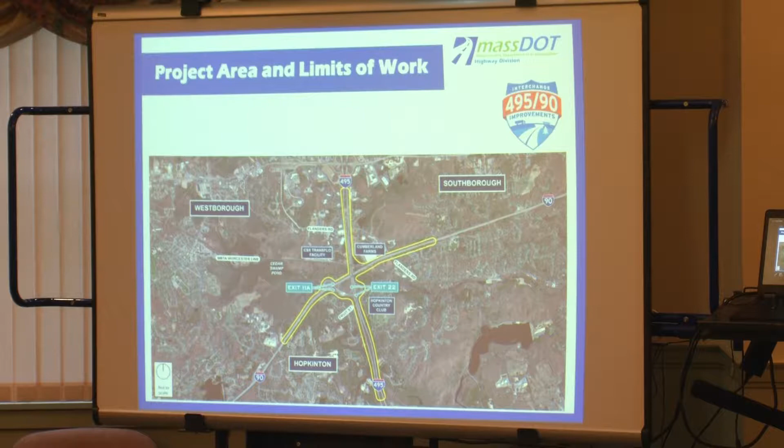With that, I'm going to turn it over to Joe Cahill. Joe is the project manager for HNTB and the entire design team.

Thank you. Like Ryan said, this is our third round of public meetings, so each successive round of meetings we've gone a little bit farther with the design and the presentation. The first round was very much data collection. We wanted to hear from people as far as what they identified as the issues, and to present some of what we were seeing from an existing conditions standpoint.

Last round we presented the alternatives that were under consideration and some preliminary evaluation of them. So now this meeting, we're going to spend some time talking through that evaluation and then focus mostly on what MassDOT has identified as the preferred alternative that's going to be carried through design.

So going back, we've spent the last 1 to 2 years doing extensive data collection efforts. We looked at traffic conditions, crash rates, the environmental conditions that Ryan mentioned as far as what's surrounding the interchange, and used that to really help guide our process. What we found is that the interchange, as many of you who drive through it know, doesn't meet the current traffic conditions today, and not surprisingly, doesn't meet them in the future.

It has a high crash rate. We see a crash out there every 3 to 4 days on average, and a lot of that is due to the undesirable weaving and queuing conditions. Traffic backs up from the ramps onto the main line highway. Also through the former toll plaza area, there's a lot of weaving movements to get through that area. So they all help contribute to a higher than average crash rate for the interchange.

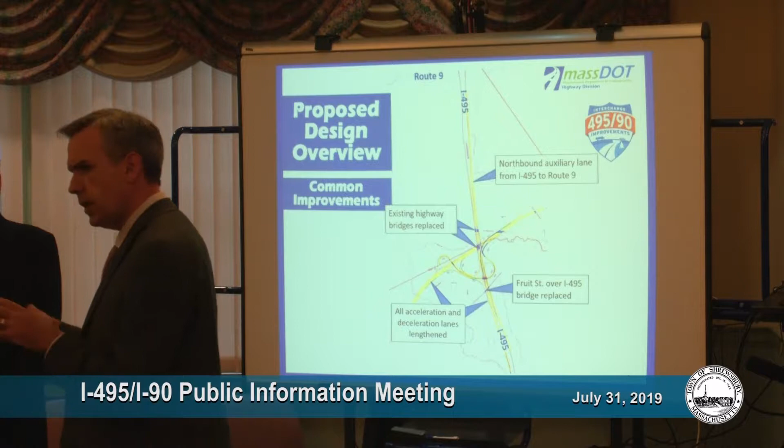So I'm just going to run through the 3 alternatives that we studied that were determined to meet the project's purpose and need that I just outlined. But before I run through them, I want to touch on a couple things that are consistent improvements across the 3 alternatives, so I don't have to repeat them each time we talk about an alternative.

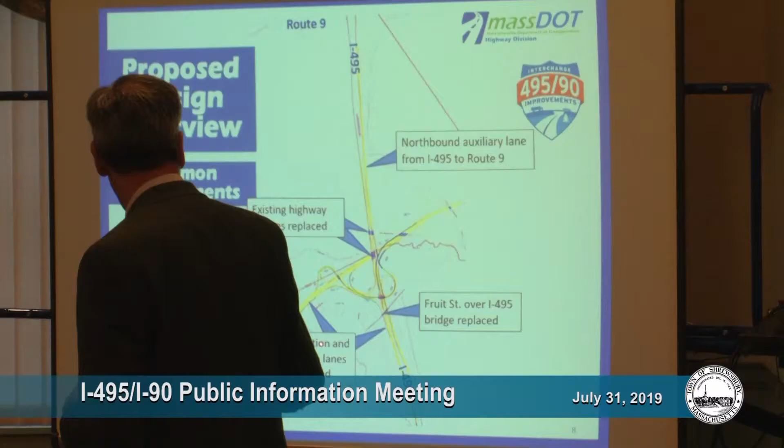First, all acceleration and deceleration lanes are lengthened. When I was talking about the crash issue, one of the issues is those acceleration and deceleration lanes are short for what is needed out there today, and that helps contribute to those crash rates and congestion issues. So all alternatives we studied improved those acceleration and deceleration lanes.

The other common improvement is the bridges carrying 495 over the Mass Pike, so over I-90, and over the MBTA Worcester line just to the north of there, are replaced with newer, higher bridges in all alternatives.

There's also a northbound auxiliary lane included from the northbound on-ramp up to Route 9. So when you enter into 495 coming from the Mass Pike and heading northbound, that acceleration lane is extended all the way up to the Route 9 off-ramp.

And then finally, the Fruit Street Bridge that crosses over 495 just to the south of the interchange is replaced. That's a relatively tight bridge - the abutments are close to the highway and it's relatively low for what we need. So as part of the interchange improvements, those abutments need to move further back so we can fit what we need to do under them.

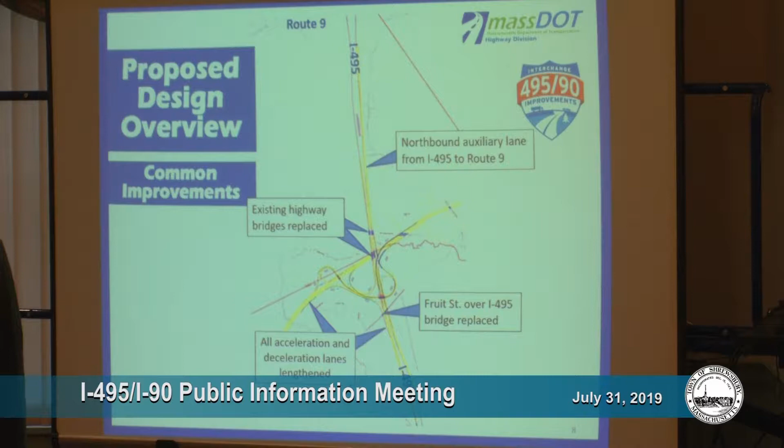So the first concept that met the purpose and need is concept 22-3. I'm going to point some of the key elements out. First, there's a blue line that comes down here - that is a direct connection ramp for people heading westbound on I-90 who want to go southbound on 495.

So currently, if you're going southbound, you have to pass under 495, exit in that loop ramp, go through that weave, and then go to the right and down to 495. This alternative eliminates that move and instead provides a direct connection down to 495.

What that does is allow for the elimination of this loop ramp, which, as I mentioned, with the curves, the acceleration and deceleration lanes, and the weaves all associated with it, is a major contributor to congestion and crashes.

Something important to note about this westbound to southbound movement is that it comes in on the median side, or the left side, of the 495 southbound highway. Normally the ramps come in on the right side - that's the preferred, desirable condition. For this to work, it would have to come in on the left side, the high-speed side. So from a design standpoint, it's not technically wrong, but it's not a desirable condition.

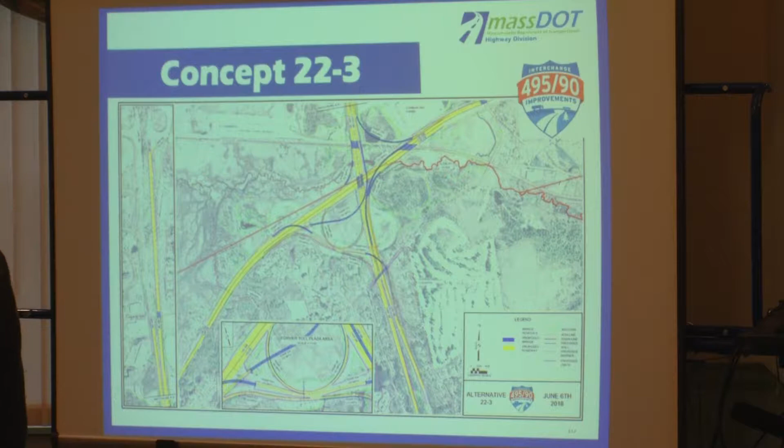And then finally, concept C2, that was the third alternative we looked at that met the purpose and need. This one takes a little bit of a different approach. It tries to use the existing fill as much as it can and avoids that westbound to southbound flyover. It does that by staying tight to the highway and then looping through the former toll plaza area and then south. So you can see there's a lot of movements going on in this area.

The difference between this and the existing condition is these ramps are braided, so they're over each other. They bridge over each other. So that's how we're able to eliminate all of the weaving movements going through the interchange.

And when we get later in the presentation, we have a series of renderings, before and after renderings and videos that should help kind of clarify what's going on in this area. You know, it's tough to see on this scale.

Like the other, 22-3, it allows for the elimination of these two loop ramps. And it's important to note that this westbound to southbound move now comes in on the right side, or the slow speed side of 495 southbound. And in general, as we go through this a little bit later, you'll see all of the curve speeds are increased, the radiuses are better, the acceleration lanes are better, deceleration lanes are better than what's out there today.

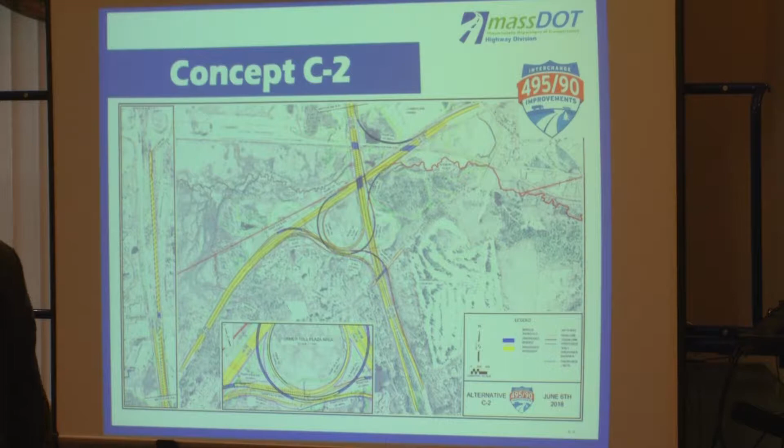So our next step is we did an extensive alternative analysis evaluation process. We looked at 100 plus categories originally. We narrowed it down to, I think, 25 or 26 criteria that we used to evaluate and compare across alternatives.

So looking at them in different categories now, the first category is safety, one of the primary drivers of this project. And so the highlighted sections here, the highlighted boxes, we highlighted them to kind of, those are the criteria that really helped help us differentiate across alternatives. So we highlighted them for the purpose of this discussion. But these two rows, top rows here, really tell the story of this category.

The reduction in yearly societal costs for predicted congestion and crashes. In other words, what are we projecting from a crash rate reduction standpoint? And the bottom line is we're seeing significant reduction in projected crashes across all alternatives. Because we're addressing the weaving, we're eliminating the weave conditions, we're improving the acceleration and deceleration lanes, and we're removing those tight radius loop ramps that are there. Our analysis was showing that the projected crashes associated with the final build condition are significantly reduced over what we would see in a no build condition.

Just moving on to some of these key differentiators highlighted. The low speed curves that I mentioned. Currently there's 18 movements that have to pass through low speed curves. That gets reduced in C2 and 22-3 to 2 movements.

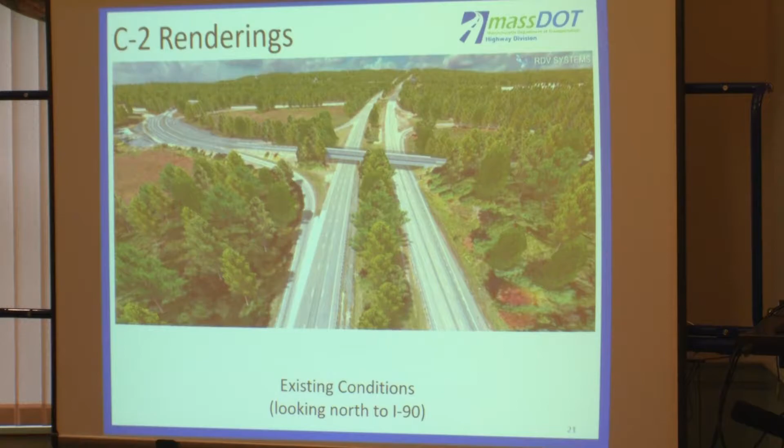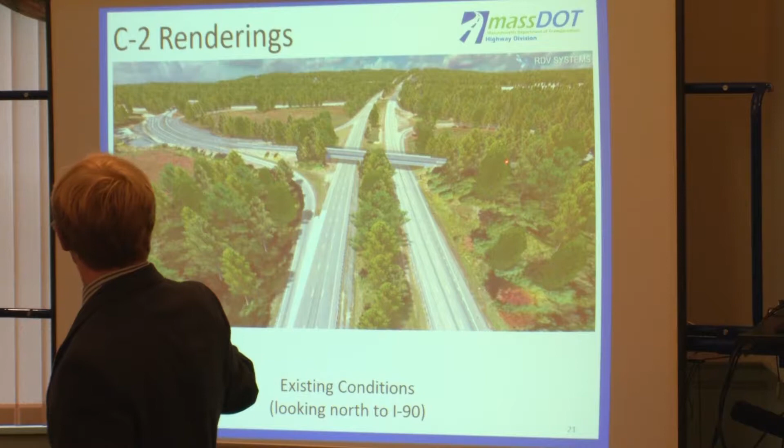So this is 90 running off in the distance right here. This is the former Toll Plaza area. Over here is Cumberland Farms. And this right here is 495 Northbound and Southbound.

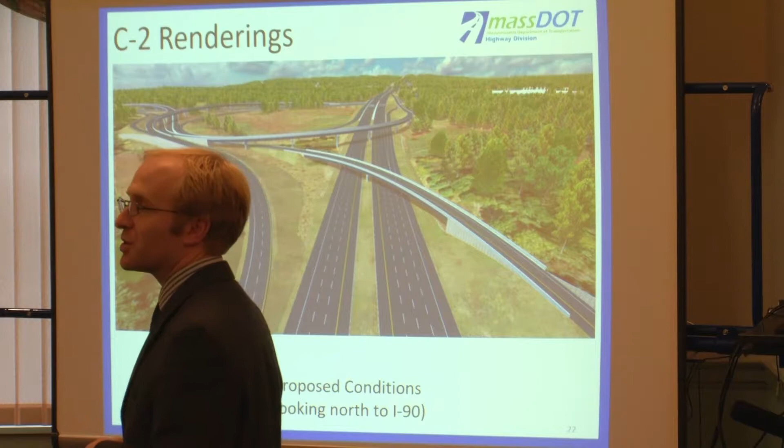And this is the proposed condition. Now, a couple things to point out here. You can see that the median is a lot narrower than it currently is. One of the advantages to this alternative is that we're able to shift 495 northbound all the way into the median. It makes the construction of the bridges over 90 and the commuter rail much easier.

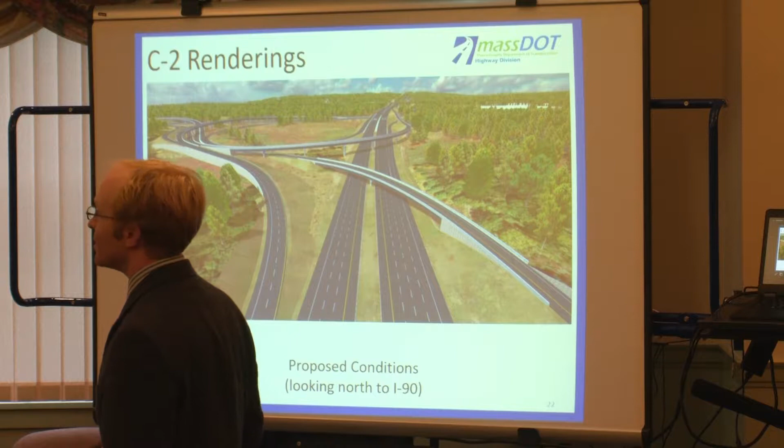What you'll also see right here is this southbound on-ramp. And just to let you see it one more time, all the way over here, and then it shifts all the way out to there. I think Jonathan's going to focus on that particular movement a little bit here to highlight the differences between existing and future conditions. But I think just about everything he says about this particular movement really carries through a lot of the rest of the movements.

We're increasing the radius, we're increasing the design speed, which helps reduce the safety concerns and reduce congestion. Also, each movement has its own lane, reducing the weaves. The conversation he's going to have here carries through a lot of the movements throughout the interchange.

Absolutely. So as a twice daily user of this interchange, I will happily pay my gas taxes to make that one movement work. Because it is so tight and there is a contour difference, and every truck stalls out making that turn, which backs everyone up.

That one thing. Would you like to come and get... No. I'm going to say thank you, because I think you have the correct... what do I know? I'm not an engineer, but just visually, a better radius.

I assume that you'll have a climbing lane going down into Hopkinton, and that'll make a lot of difference, because just this morning, the truck was going very slow, and everyone behind them was extremely frustrated. So if you're not in the left lane, you're going to get cut off as everybody pulls out into the center lane or the left lane at 35 or 40 miles an hour to try to get around the truck they've been stuck behind.

That's exactly right. So using that as an example, we've increased the radius dramatically. Right now, it's right around 30 miles an hour is the best you can get on that turn, and this is up around 45 miles an hour now. In addition, there's a full shoulder on the outside, and it's 2 lanes.

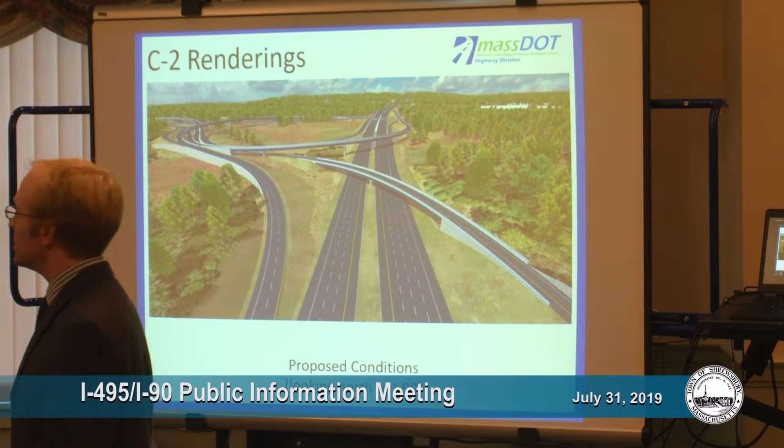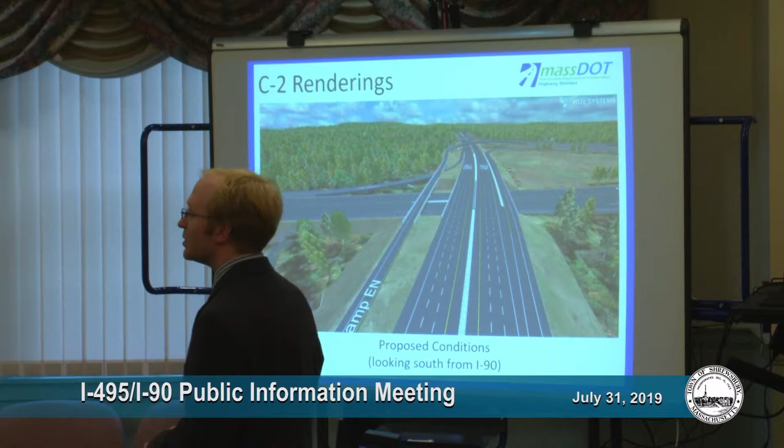I'll look within the toll plaza. This is where 495 and 90 meet. This is 495. This is 90 in this direction. This is the toll plaza.

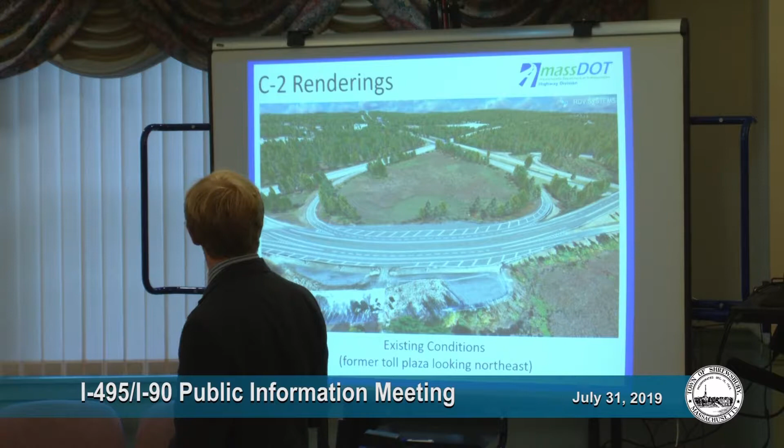And I look at the proposed condition. So Joe was talking about grade separating the ramps before. You really start to get a feel for it here. This is the I-90 westbound to 495 southbound ramp, and you can see it crosses over all of these other ramps without requiring you to weave with any other traffic.

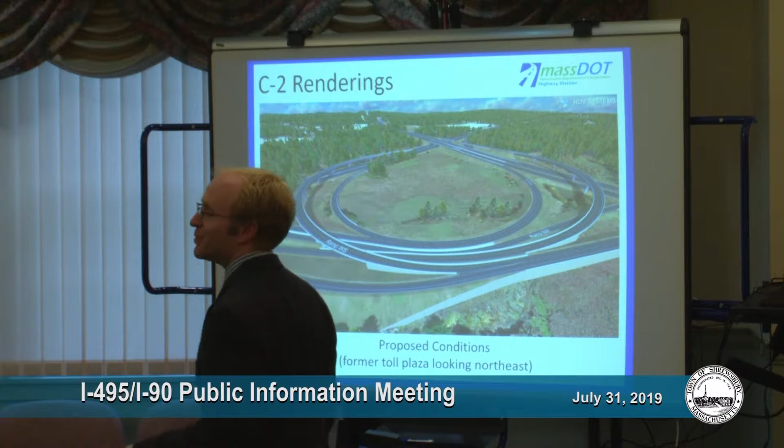And then you simply meet up with the eastbound traffic and you stay in your own lane if you want to. You can change lanes if you really want to—there's no reason to, but you can. You meet up with 495 southbound. Similarly, eastbound is coming on and meeting up with you at that same point.

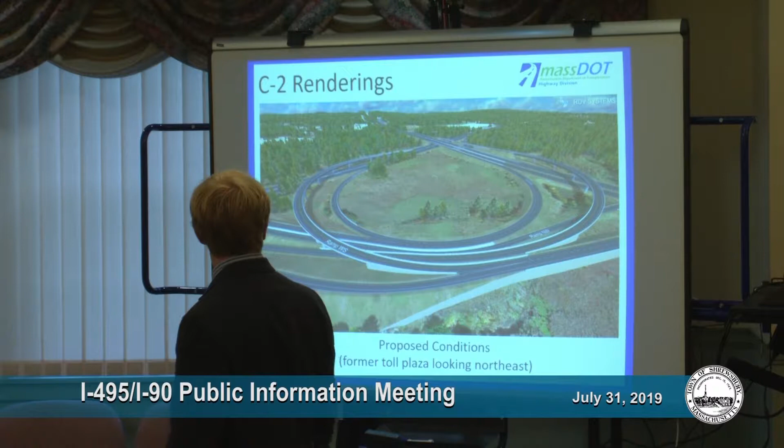Looking the other direction now, we are looking from I-90 into the toll plaza. This is the 2-lane ramp coming off of I-90 eastbound, entering into the toll plaza to go to 495 northbound and southbound.

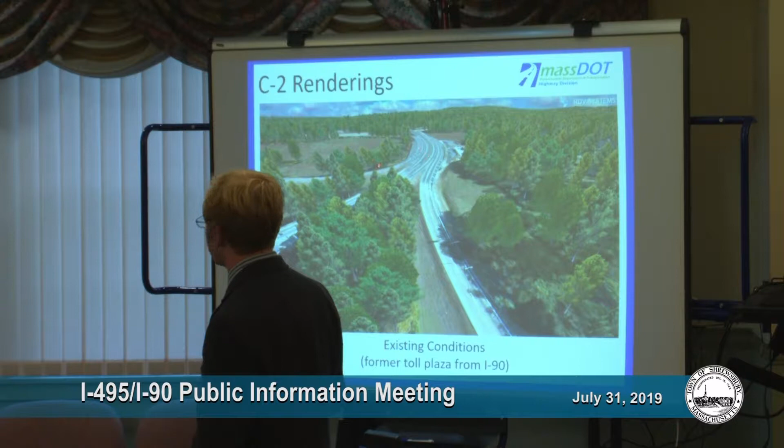And this is what the proposed condition would look like. You can see how instead of being 2 lanes coming on and then meeting up with your westbound traffic that also was looking to go to 495 northbound and southbound, and having that weaving area that exists out there today, you have 2 separated movements that diverge somewhere around here. And then all of your westbound movement is carried over and meets up with the eastbound without having any of that weaving movement.

Looking from 495 into the toll plaza, this is the toll plaza right up here. This is the connection bridge from the loop ramp that loops around from 495 northbound. This is 495 northbound, this is 495 southbound, and off in the distance there is I-90.

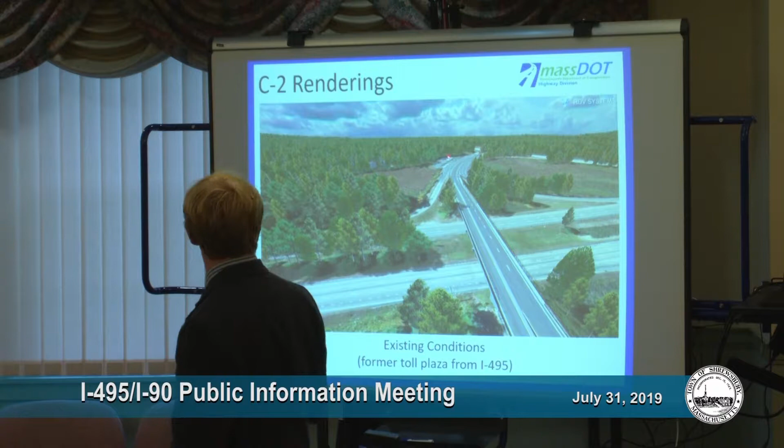And then your proposed condition—we talked about removing those loop ramps. You can see that the loop ramp is completely gone in this proposed view. One thing to note: the loop ramp that exists out there today, going from southbound to eastbound, that's maintained, but with much improved geometry.

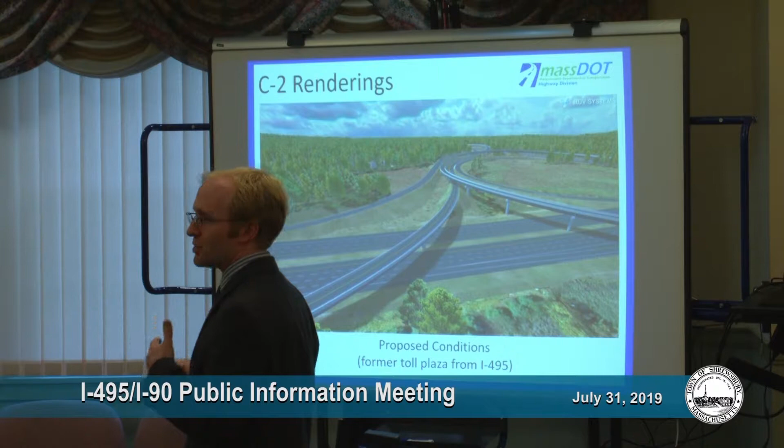Right now you have a very short, very tight curve, and then it's nice and flat in the toll plaza area, and then you tighten up really, really fast trying to get onto 90. That's all smoothed out now, so it's a nice simple geometry, and you won't have that slow, slow, fast, fast, slow, slow feel going on anymore.

Taking a look at I-90, what I-90 is going to look like—we're looking west, just off of 495 southbound. This is where your connection ramps currently are into the toll plaza. The toll plaza is right here, and the Sudbury River is running right over here.

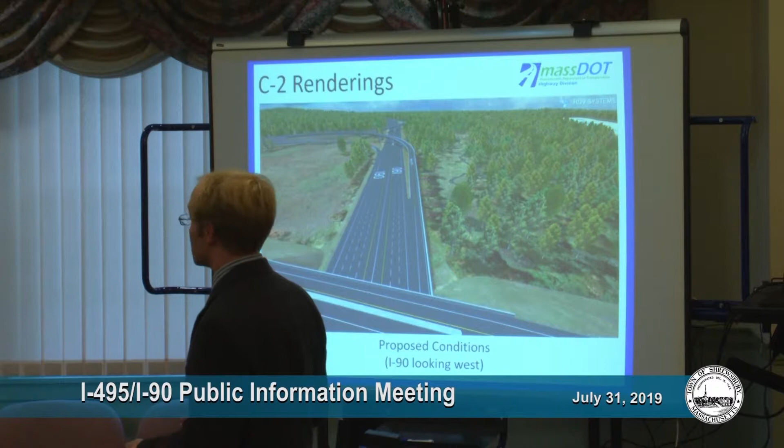And this is what the proposed condition looks like. You can see the loop ramp used to be right here, and we've replaced it with a flyover right there, and a forward flyover for your westbound on-ramp right here.

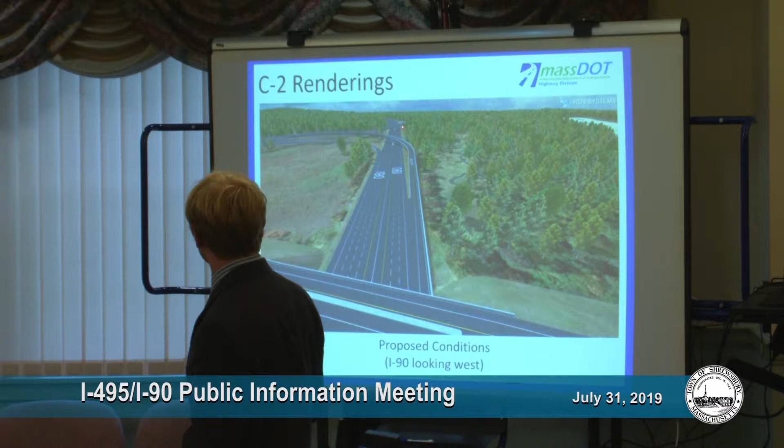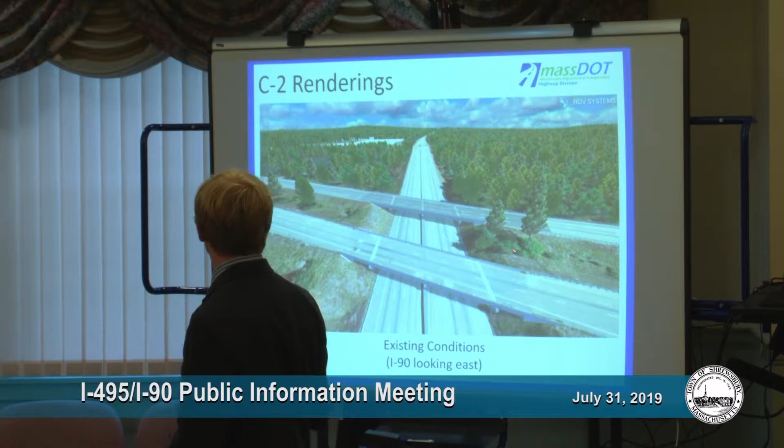Looking in the other direction, now we're looking east towards Boston. This is 495 northbound, 495 southbound. The Cumberland Farms facility is right here, this white splotch.

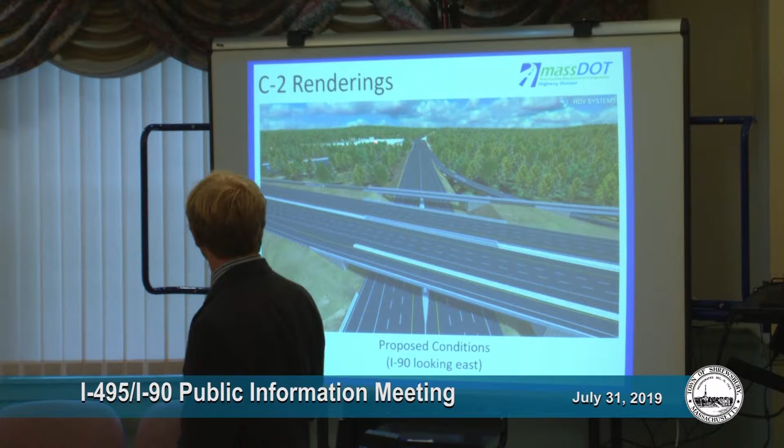And then your proposed condition—again you can see that 90 slip ramp from 495 northbound, that 90 eastbound connection. Right here, traveling just next to Cumberland Farms, and just north of the railroad, right here, is your westbound to northbound movement—your I-90 westbound to 495 northbound movement.

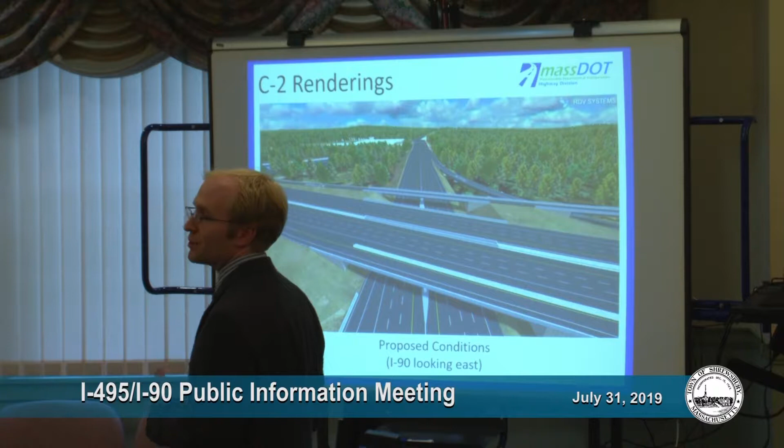All right, a couple of videos.

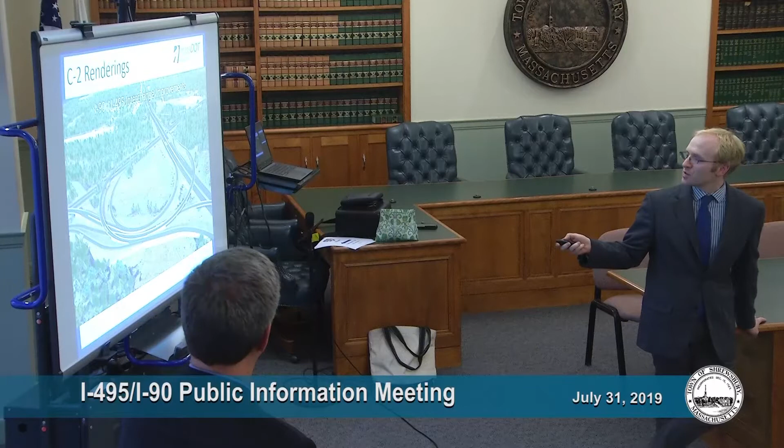Is there any land taking as part of this, or does the state basically own all of that? We're still working some of that out, but what's pretty impressive about this project is because there's so much land as part of the interchange already, and because we worked so hard to keep a lot of the movements—albeit grade separated now, but still working through that existing toll plaza area—there are not planned to be extensive takings as part of this project. I think right now we're looking at less than an acre, which is important for the people whose property it is, but again, for a project of this scale, not significant.

What's the total acreage for the whole sort of project area? A couple hundred—gosh, a couple hundred acres? I don't know if I've ever calculated it out. Joe, do you know? Yes? I would say at least 100. I don't know either, but it's pretty big. Good question—don't have the answer. We're thinking 100 or greater, but just to get a sense of scale.

So I'll run this video.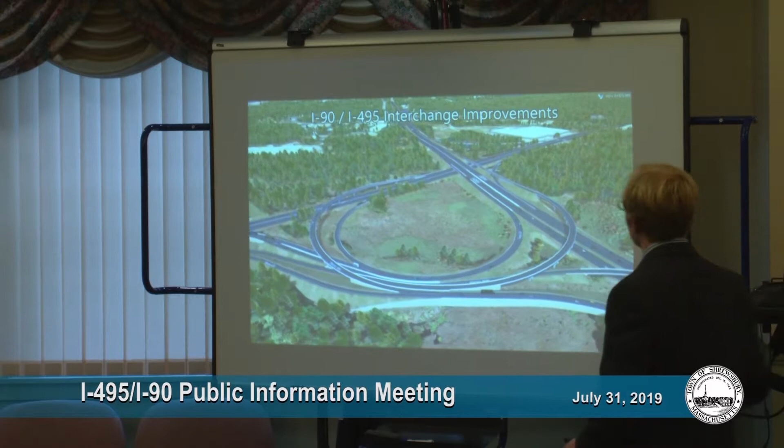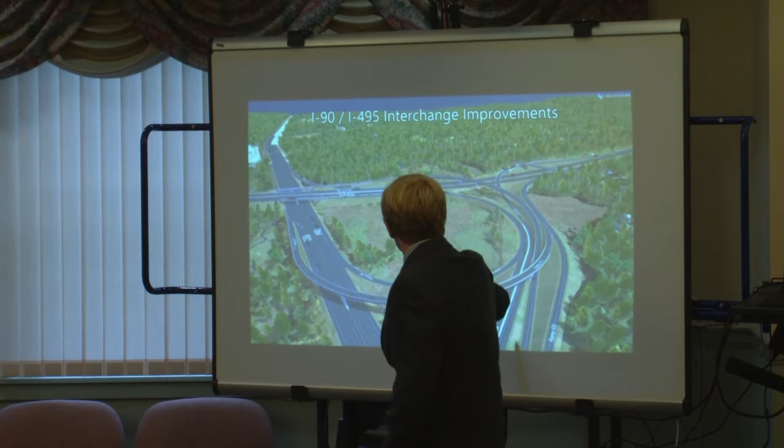We're gonna do a little spin around over the whole interchange here. You can really see the braiding as we're spinning around. And again, that simplified geometry right here on this loop ramp, where it was once really tight in that area, makes a big difference on that southbound to eastbound movement.

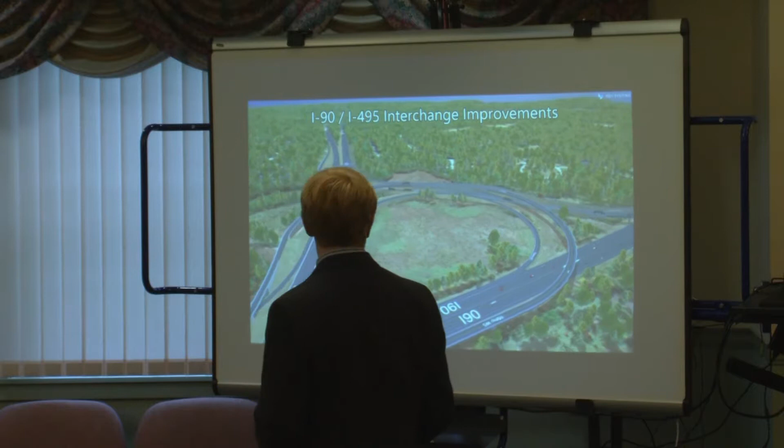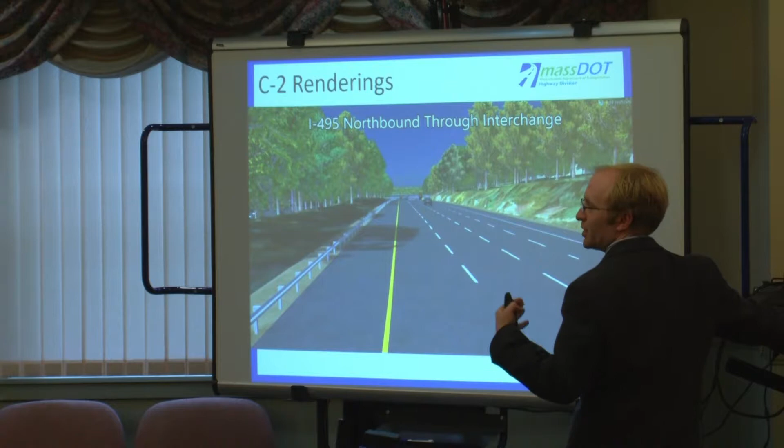We're gonna do a couple drive-throughs now. So we're going from 495 northbound through the interchange. We're gonna be in the left lane, so we're gonna be going pretty fast, and I'll point out some sites along the way. If folks would like to see any of these again, we're happy to play them, just let us know. So your northbound to I-90 westbound movement has just exited off.

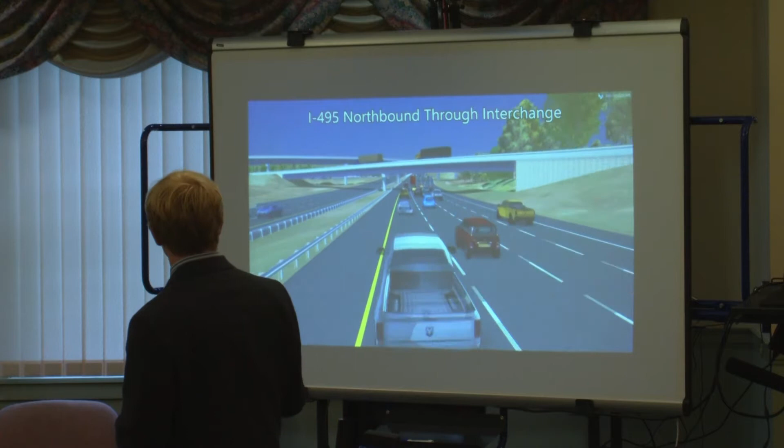And crossing over, at the same time we've opened up for the eastbound I-90 movement, and that just exited off. Now we're going to cross over I-90. Your I-90 eastbound traffic is entering onto 495 northbound. Then that lane merges in, and your I-90 westbound traffic to 495 northbound merges on.

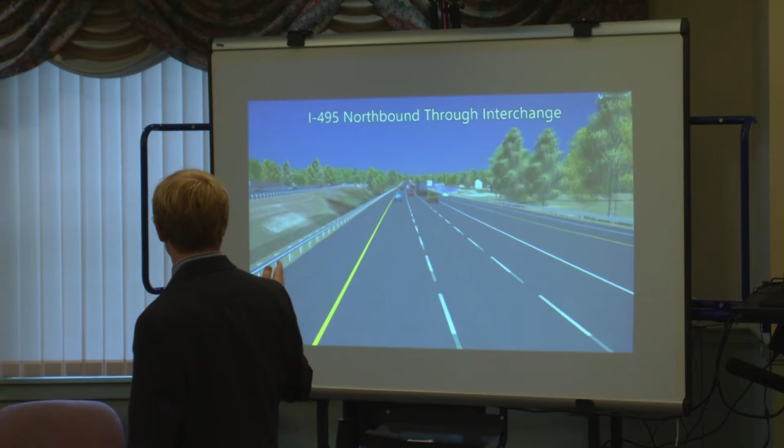And then as we talked about, this fourth lane continues as an auxiliary lane all the way up to the Route 9 eastbound exit. That's about 3,000 feet long or so, about 2/3 of a mile.

Did you give any consideration to merging the westbound to northbound and eastbound to northbound ramps before merging them with 495? Only because I see two merges there, two merge points. I just didn't know if it would be easier — armchair engineer here, the internet's a dangerous thing, right? — if you merge those two early and then that combined traffic merges into 495, if that would help.

With the Route 9 area, there are some environmental issues running along the sides of 495. Another benefit of shifting 495 northbound into the median is that we didn't have to widen out so much into the side wetlands that run along that area. There are also some intermittent streams and some open water on that side, and a lot of that plays into where the westbound to northbound movement enters onto 495 northbound.

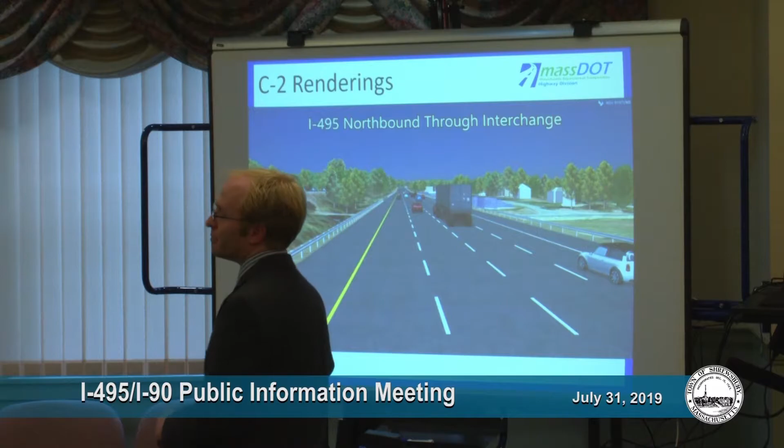The other thing is, if you combine them into a single ramp, even if it's two lanes, and then combine it on, the westbound to northbound comes on closer to Route 9, so you're pushing two lanes of traffic merging closer to Route 9, pushing more traffic into that friction zone. So if you can pull out a movement and combine them in earlier, it removes a good chunk of that traffic and allows them to distribute before you push on the westbound to northbound.

I have concerns from things I've seen in the past, and I can't tell how this is different, but the interchange between 290 or Route 85 in the Hudson area that goes onto 495, with those big sweeping curves, is where trucks roll over all the time. Same with Simarano Drive, where it's really high up at an angle, with wind and ice all the time — my brother-in-law was actually in an accident there, it's a horrible intersection. So how is all this looping and raised structure going to be different?

Those were not built that long ago, guys, so I don't consider them brilliance in engineering. So how is this going to mitigate some of those issues with the curves, the ice, and the wind?

One thing is, it's going to be lower. Some of the alternatives were 50, 55 feet high because they were stacked on top of each other. With this alternative, they're not stacked — the high points are kind of crossing instead. So the bridges are not as high as what you'd see at Simarano. I think we're like 30 feet high. For the I-90 westbound to 495 southbound ramp specifically, that one's about 35 feet high.

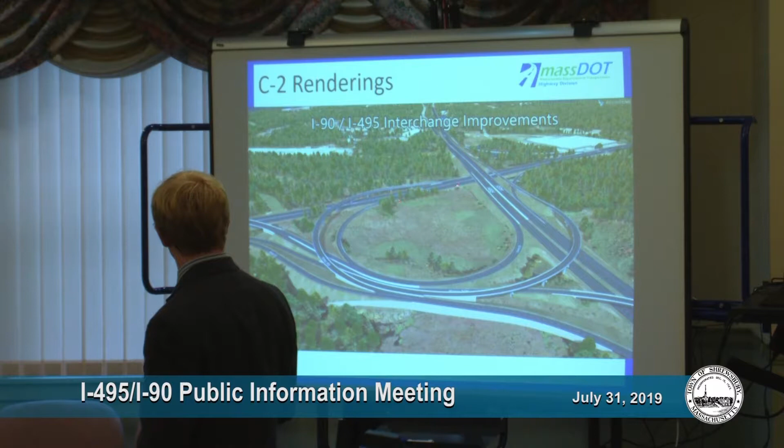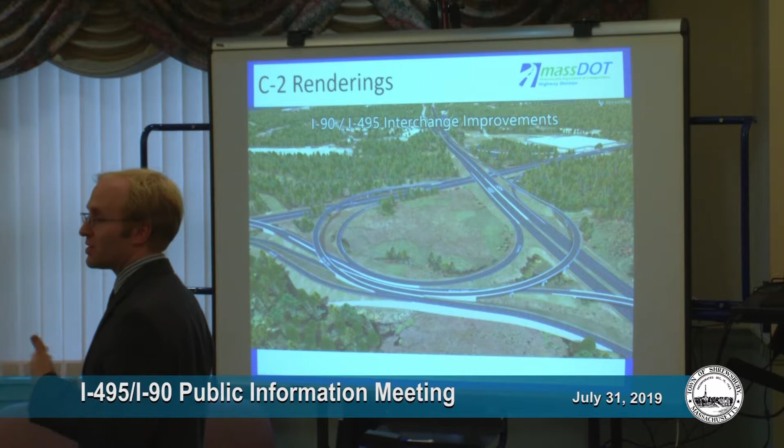So every ramp, except for this loop ramp right here, the southbound to eastbound ramp that I talked about before, has a design speed of at least 45 miles an hour. The northbound to eastbound ramp was designed to 50 miles an hour, as was the westbound to northbound ramp. All the other ramps are 45. At a minimum - some portions have larger radii that allow you to go a little bit faster, but the minimum speed was designed for 45. That's compared to the existing loop ramp design speed, which is generally 25 or 30 miles an hour - and that's being generous.

When you're making the comment about the trucks rolling over - those are those types of ramps. I got to see one of those, that wasn't any fun.

The other thing is, I take the commuter rail also, and I know there are plans underway to hopefully, in my lifetime, expand the commuter rail into Boston. I'm kind of thinking some of it would be taller trains and things like that, maybe even Amtrak type lines. Did the height of these allow larger, taller things to pass under them?

I'm kind of a future person - if this is 5 or 10 years out, I want to make sure. Well, so are we, because we don't want to invest this type of money into infrastructure that then precludes somebody else from doing something. So we've met with the MBTA a couple of times - they also have plans or desires for a third track through there. We've talked to them about timing of that, they're not quite sure.

We've talked to them primarily about where in relation to the other two tracks they'd like to see that, and they've let us know. So as Joe mentioned at the beginning, we're replacing the 495 bridge over the track and the I-90 bridge over the track. Each of those new structures will be wide enough to accommodate that third track whenever that happens.

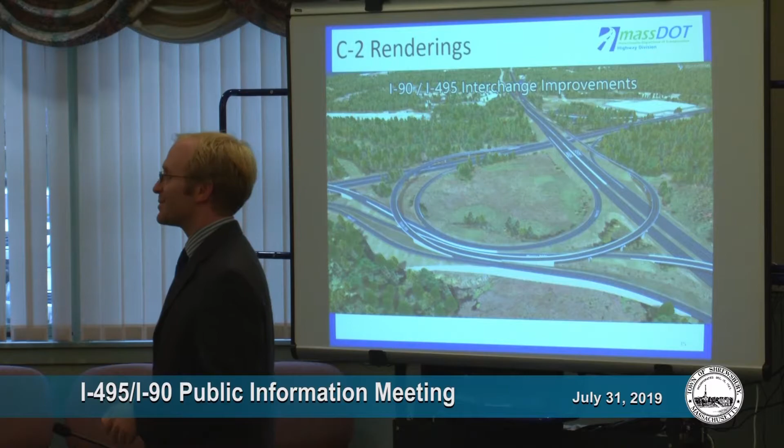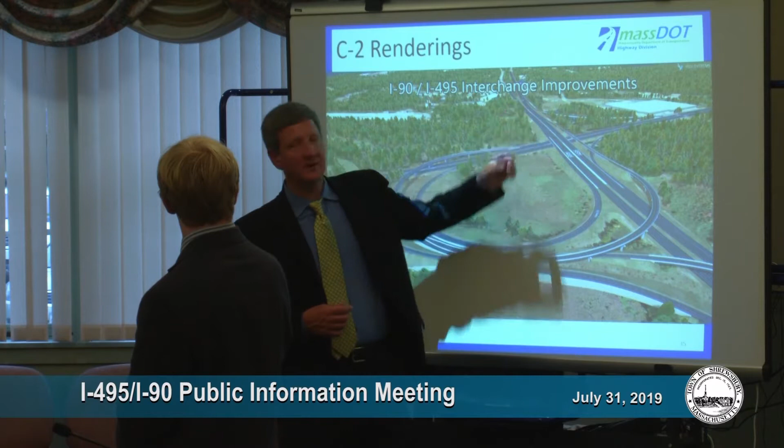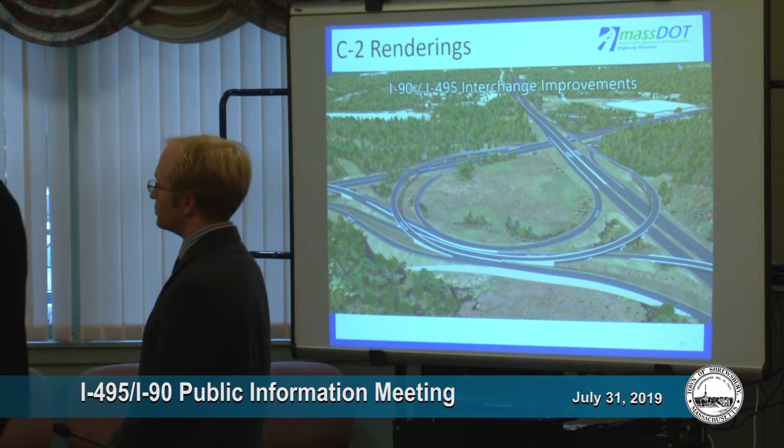And we understand that, and we're sensitive to that, which is why it was part of our matrix. We want to be sure that, construction's never easy, we get it, but we want to make it as easy and as least disruptive as possible. So that's how we also look at our construction staging, to pull those movements out - for example, maybe this westbound to northbound ramp gets built earlier, so traffic who wants to make that significant movement can start using it earlier in the construction process and avoid the rest of the area entirely. Similar with northbound to eastbound, the more we can build offline up front, the more we can get people out of the main construction zone.

Probably the only local resident here that lives on Flanders Road. Can you address the construction phase? First of all, I think at the prior meeting, they were going to replace the Flanders Road bridge where I-90 went over Flanders Road. It looks like that's no longer the case - you're not replacing that bridge, right? So that's not affected. As somebody on the east side of 495 and south of the Mass Pike, I'm constantly going up Flanders Road and also Fruit Street because sometimes that's the better way to get to Westboro. What will be the impact? Will there be closures of Fruit Street, or will it always be left open? And the 495 bridge over Flanders Road, how will that be affected during the process?

So as far as Fruit Street, we haven't determined yet if it would be a full closure or a staged construction. You could do it in such a way that you do alternating - put the temporary signals and do the alternating traffic, closing one lane at a time. As Jonathan mentioned, we're really just starting to dive into how this thing, from a staging standpoint, is going to get done. So those are things we're looking at now as far as whether it should be full closure or alternating.

They both seem viable, it just depends on how that works from an impact standpoint to the residents and so on. As far as Flanders, which Flanders bridge? The one you're going to be doing, you're not going to have any impact on the I-90 bridge over it. Right, Flanders, so of the four bridges...

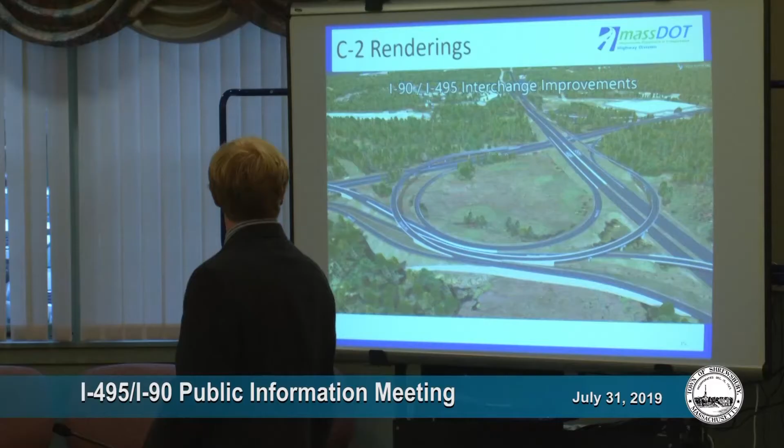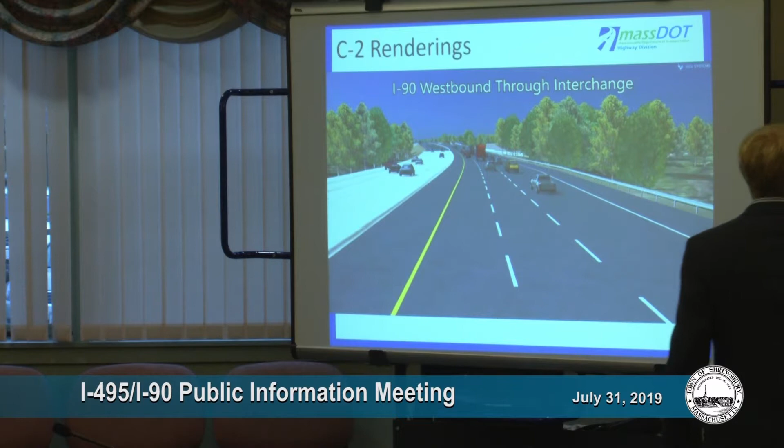So we saw the 495 northbound through the interchange. We'll take a look at I-90 westbound through the interchange. So Cumberland Farms is off over here, and I-90 to 495 northbound is exiting off, crossed over the rail.

The lane is opened up right here for the westbound to southbound movement, just after crossing under 495, we exit off and cross over 90. Then we have a 2-lane ramp coming over, carrying northbound and southbound traffic, similar to today, except you have full acceleration lanes, a much higher design speed, and a full shoulder on the outside.

Right now, when you come on to I-90, you're right up against the edge of the road, and if there's a crash, or maintenance going on, or snow, that right lane is less helpful than it normally is.

How far will you carry the merge lanes up the hill? So you have your acceleration distance. We start off making sure we're meeting the federal guidelines for proper acceleration distance. Then we took a look at how the traffic model was working. We modeled the entire interchange and took a look at how vehicles were merging and what kind of space they had to merge with the mainline traffic at that point. And if we needed to extend the acceleration lane a little farther there, we did.

And then after that, there's a required length of 1,500 feet beyond the acceleration lane for an auxiliary lane when you have a 2-lane entrance.

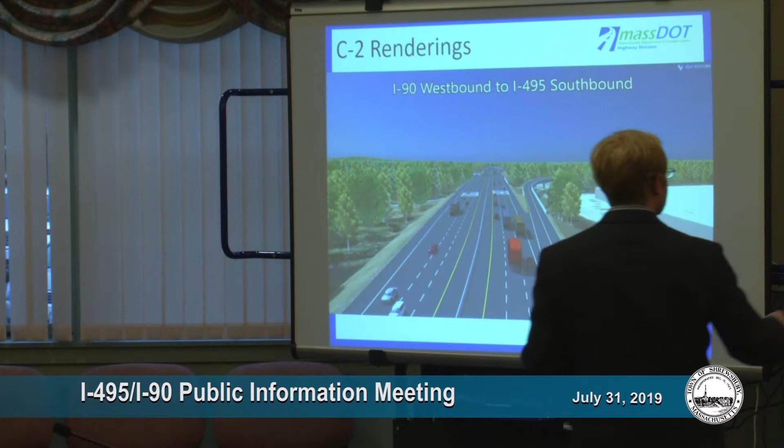Just for reference, that's the westbound to northbound movement, exiting off, crossing over right next to the MBTA line. Now we're exiting into the deceleration lane, and just when we get to 495, we exit off of the main line.

So now we are on the ramp to 495 southbound. We're going to cross over 90, cross over all of the ramps that are heading to 90, and then meet up with the 495 southbound lane that's from I-90 eastbound.

So we are in this lane right here, and we merge in with 495 southbound. The outside lane continues for a distance to get up to acceleration speed, or mainline speed, and then that merges in. Then we have another 1,500 feet before the next lane merges in. That kind of answers your last question too—you've got the two lanes, you've got a distance to move onto the main line and then move over.

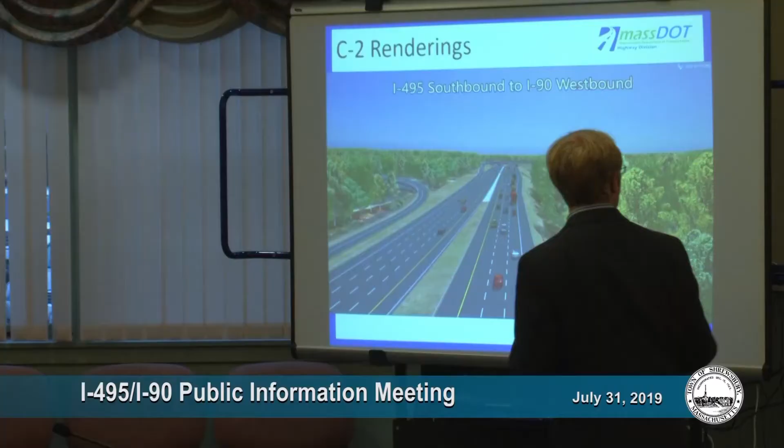The next one is southbound, I-495 southbound to I-90 westbound. So we're exiting off right here before we get to I-90.

We're in this lane. One thing to note right here, you can see this row of trucks. The traffic model you see in front of you is based off of the actual truck percentages forecasted for this interchange, so you can see how many trucks are moving through this interchange every day.

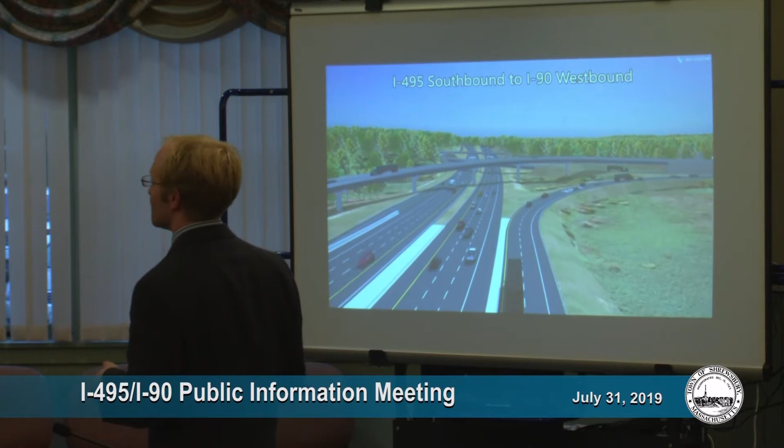This ramp is carrying eastbound and westbound traffic, but you have your own lane—you never have to change a lane once you've chosen your destination.

Eastbound exits off, we're in the westbound lane. We're merging with the northbound traffic, so we're in the right lane.

Again, you can see another row, a little caravan of trucks right there. This ramp actually handles, of the total vehicles on this ramp, 1 out of every 4 vehicles is a truck over the course of the day.

The right lane merges on and merges in right here. And then you have another 1,500 feet before the next lane merges in.

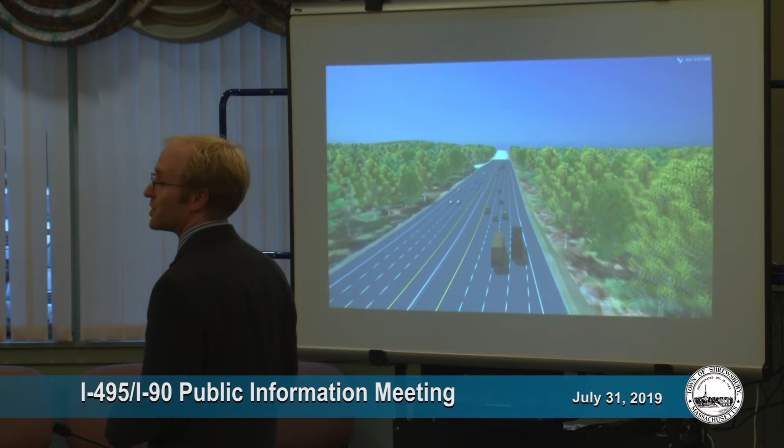I'm guessing that there's going to be a reduction in sound in that area, correct, as a neighbor?

We're doing a noise analysis as part of state and federal regulations for a project like this. This is called a Type 1 project. We're required to do a noise analysis, and if noise barriers are reasonable and feasible, then we build them as part of the project. That analysis is currently being conducted.

Going to go right to the second bullet. This requires a draft environmental impact report under MEPA. The noise analysis will be part of that EIR, which will probably come out for public review and comment in the September, October timeframe.

But next steps: finish this third round of public outreach. This is our 7th time giving this presentation. We have one more tomorrow night in Holliston, and then we're going to a meeting next week focused on the environmental, state, federal and local environmental agencies. That concludes this third round of public meetings.

We are already working on the draft EIR, assembling all the pieces. It's under review, and it'll come out early this fall. At that point, we'll get a secretary certificate from EOEA, and at the same time, we're working on 25% design for the overall project.